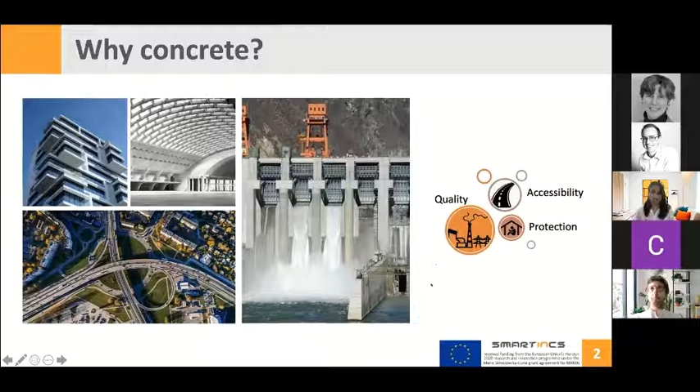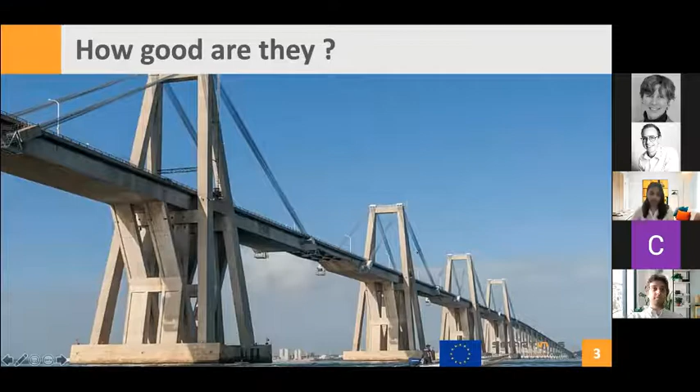Thank you, Gabriele. In the beginning of this workshop, Neely clearly mentioned how concrete and infrastructure is important for us. From a user point of view, concrete gives us quality of life in terms of accessibility and protection through buildings and infrastructure alike. But these marvelous structures don't always look in perfect condition and can perform their intended functions as required throughout their service life. During construction, they are given a certain performance range and also designed for a specific service life.

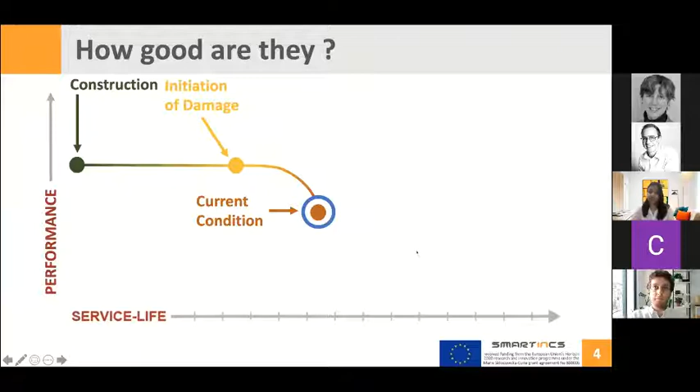During the service life, an initiation of damage can occur. In this current condition, it can be both internally and externally that damages affect different structures based on their environmental conditions. This can be some macro cracks that can compromise the durability functions, as we saw in earlier presentations, and lead to ingress of harmful ions like chlorides and sulfate attack, also inducing stress-induced damages.

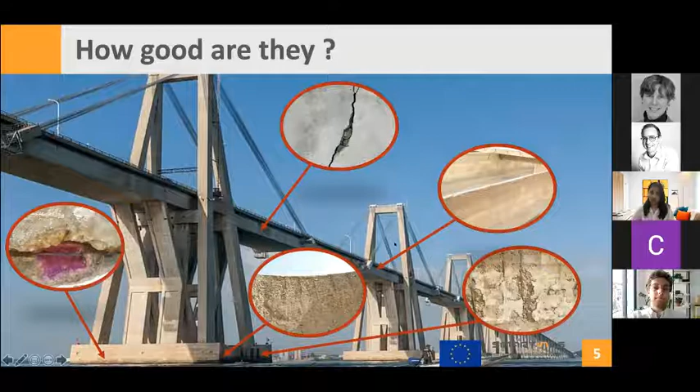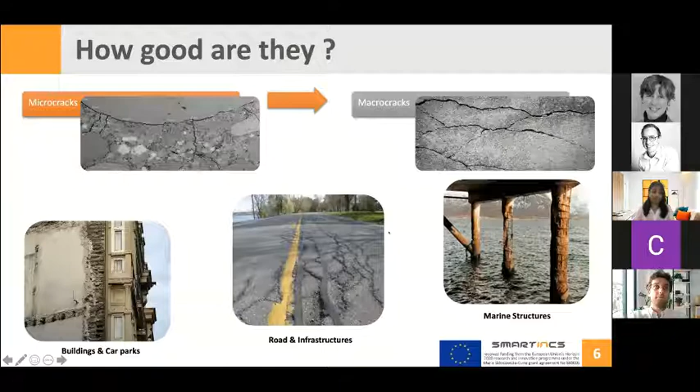This occurs in the range from micro scale, where the inevitable heterogeneous nature of cementitious systems creates microcracks, which, when unattended, can propagate to form macro cracks. And if that is also not controlled, it ultimately leads to damage of the entire structure. It can range from buildings and car parks in a normal environment to very extreme and harsh environments, such as in the case of marine structures.

And thus, in this current damaged situation, when no intervention is done, you can clearly see there's a reduction in performance and it does not achieve the required service life.

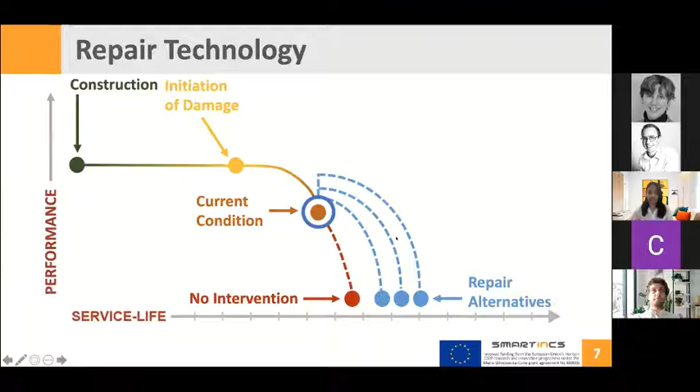In current practice, we have different repair alternatives where we attempt to increase the performance and also slightly increase the required service life. This repair technology can be both structural, like in the case of FRP sheets used for strengthening structural elements, some corrosion repair techniques using galvanic protection and coatings of the rebars, and more localized repair using repair mortars and epoxy injections for both patchwork as well as localized damages.

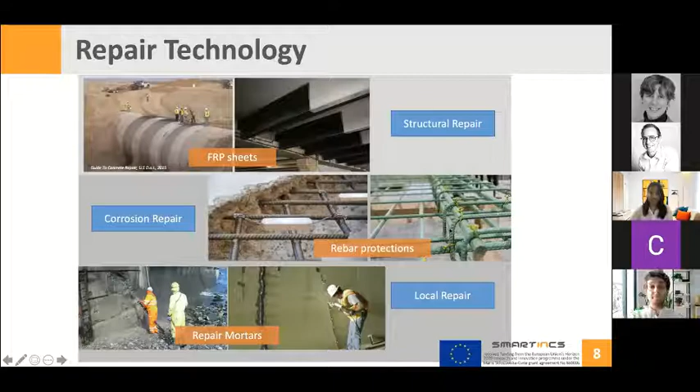However, there is still some challenge that exists in this repair technology. For instance, they are not entirely durable, meaning repetitive repair is required for the same place and the same damage scenario, which makes the whole system a bit inefficient in terms of cost and time. It can be alarming to note that per annum, billions of euros are spent only on repair and maintenance. And as we know, most repair technologies use cement-based systems, and cement causes a very big burden on the environment and can be very polluting.

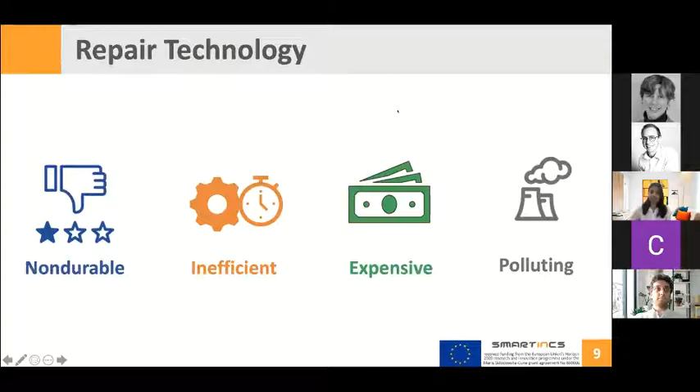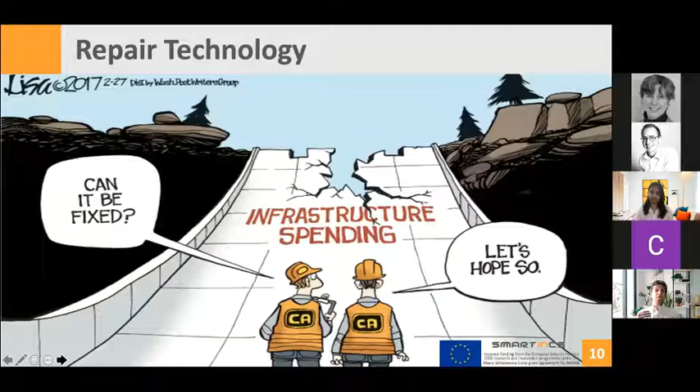This leads us to a comic which is actually quite accurate, where the spending, not just related to infrastructure but to every type of structure system, is extremely expensive. At the same time, this often becomes prohibitive from a practical, applicative point of view, so that whenever there is the question, can it be fixed? Well, the answer is, let's hope so, because most of the time, apart from being extremely expensive, it's also very complex and sometimes unfeasible from a practical point of view.

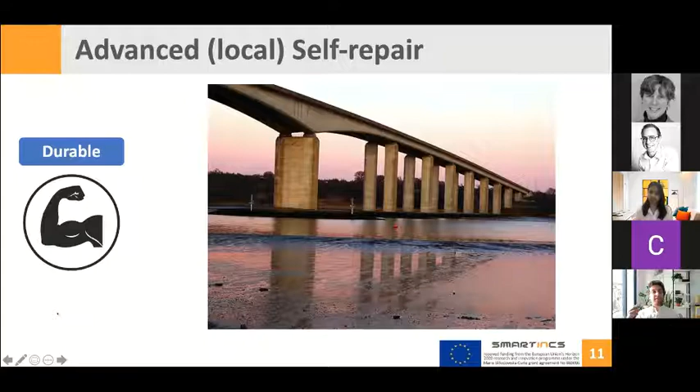So what if there was a system which was durable in terms of the performances it's been designed to achieve and accomplish, both structurally and from a serviceability point of view? At the same time, taking into account what Claire and Sina presented before us on self-healing, there are different self-healing, self-repair methodologies that can be applied and used to accomplish a durable and sustainable system.

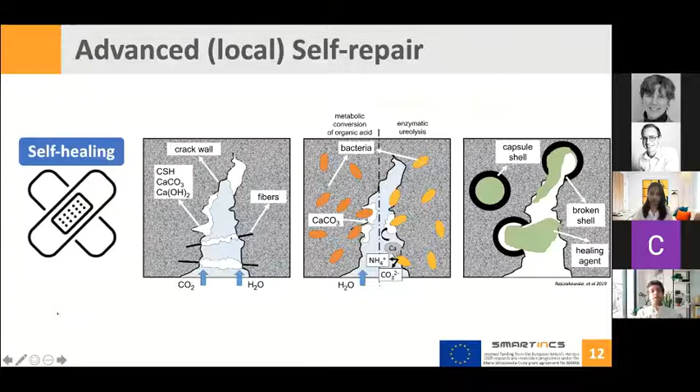Moreover, it could be very interesting to achieve a self-sensing approach related to the system, where different sensors and techniques and methodologies can allow us to understand how the system is getting damaged, how we can trigger the self-healing or self-repairing responses, and at the same time understand to what extent these repair processes have been effective and efficient.

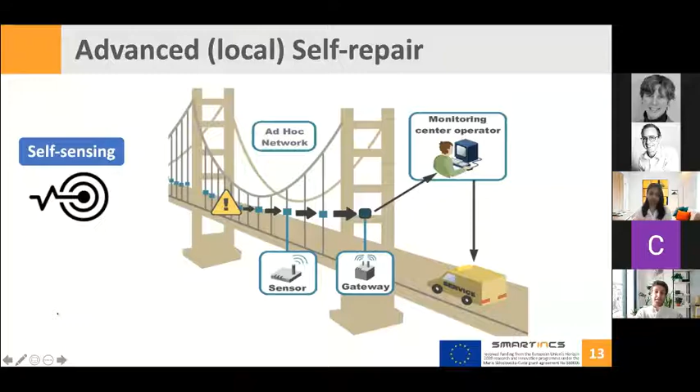As Priya has previously presented, at the same time, sustainable concrete is a very strong issue, as she has just said, that cementitious materials such as concrete, mortar, and grout are extremely polluting.

Allow me a brief digression with respect to our current times. We know that recently, several countries in Europe, but actually all over the world, are focusing on recovery funds to trigger the economy back after the strong hit suffered from the pandemic. This generally is reflected in the production and construction of many structures of different typologies. However, this is strongly in disagreement with the carbon neutrality pacts that many countries are committed to achieve by 2050.

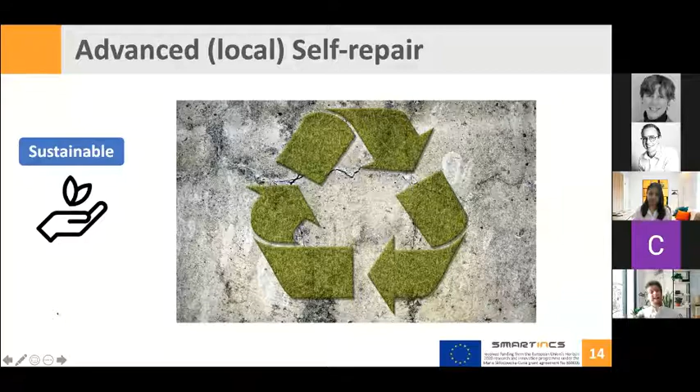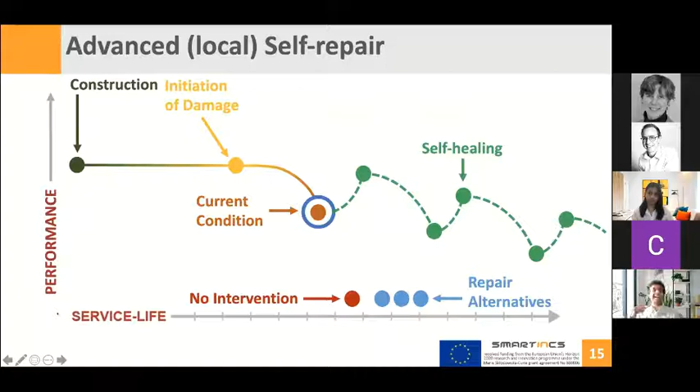So what if there was actually a system able to be sustainable and at the same time, why not, even depolluting? If we go back to the graph that Priya was showing us before, and having understood the current limits of the various repair alternatives we have right now, achieving a self-healing, self-repairing system might strongly increase the service life of our system, giving us a more durable, self-healing, self-sensing, and sustainable material.

And this is the SmartINCS ambition, within the 4 work packages where the 15 early stage researchers are working on how to investigate and produce related technologies. For example, work package 1 focuses on the material point of view, different self-healing, self-repairing methodologies that Claire and Sina have just presented. After that, the application approach, a practical use of these self-healing technologies applied in the construction field. Then we have work package 3 related to the durability point of view, on a time scale of the application developed in work package 2. Eventually, work package 4 focuses on the technological transfer, achieving a commercialization route for these methodologies.

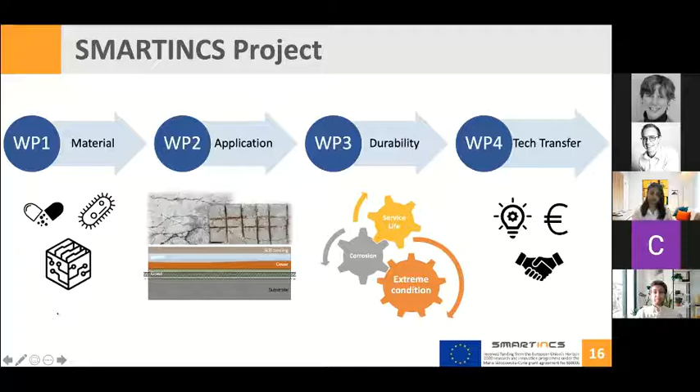Priya and I, and as I will explain in the following slide, 3 other early stage researchers belong to work package number 2, where we're focusing on the application use of the technological methodologies developed in work package 1. Who are we?

We're 5 early stage researchers working in 4 different universities in 3 different countries, all led by Professor Schlangen from Delft University of Technology. As you can see, we are formed by Sina, who just presented the previous work package, since his work is quite essential to both work packages, as he's focusing on the modeling point of view.

Then we have Suelen, who's working on an interesting self-healing cementitious grout. Then we have Priya, my co-presenter, who's focusing on self-healing repair mortars, and Sham, who's working on trying to exploit the potentialities of self-healing cover zone of concrete. Finally, there's myself working on the self-sensing point of view application of these self-healing techniques.

So like Gabriel mentioned, we are 5 different researchers working on different projects, but together we are trying to combine the different technologies we're developing to form one single multifunctional advanced repair system needed in this current scenario. This is intended to be durable, self-healing, as well as self-sensing, and of course optimized so that it can be deployed in the industry and benefit the ultimate goal that SMARTINCS works for.

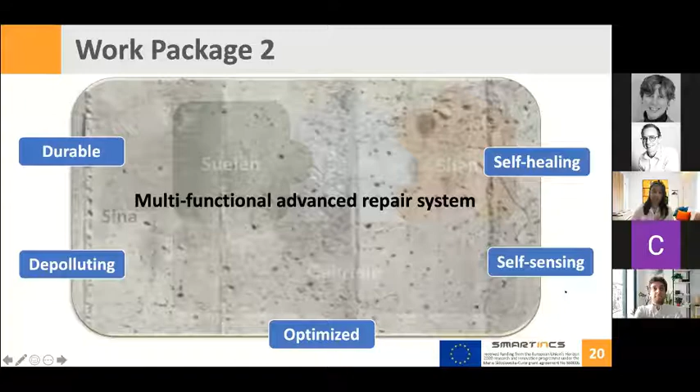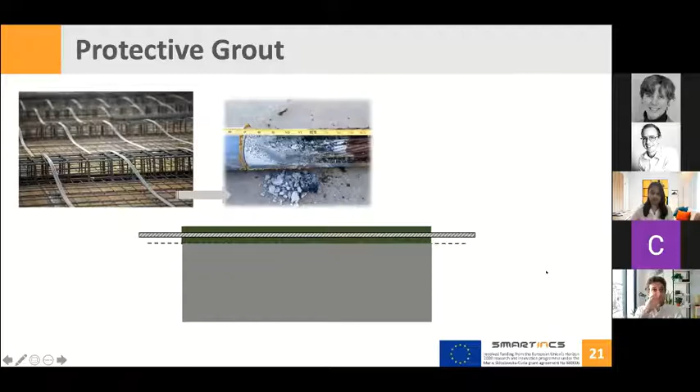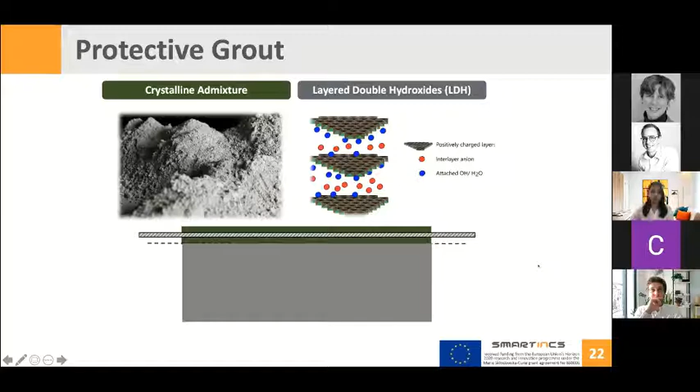To begin with, we have Suelen working on a protective grout. We know that post-tensioning strands in their current scenario undergo corrosion within the strand ducts itself. To prevent this, the protective grout is intended to cover the cables as well as the rebars. In order to achieve this, the use of crystalline admixtures as the core material, as well as layered double hydroxides which will exchange the harmful chloride ions, will be used. Ultimately, this will result in a non-shrinkable and durable grout system with the benefits of crystalline waterproofing admixture.

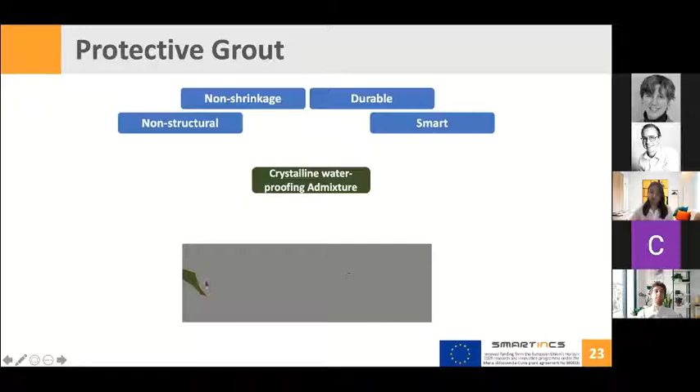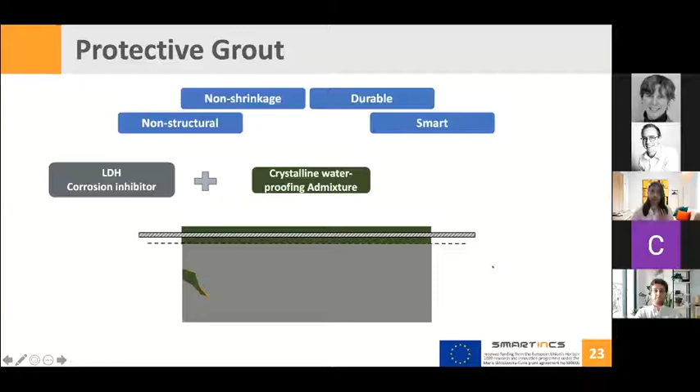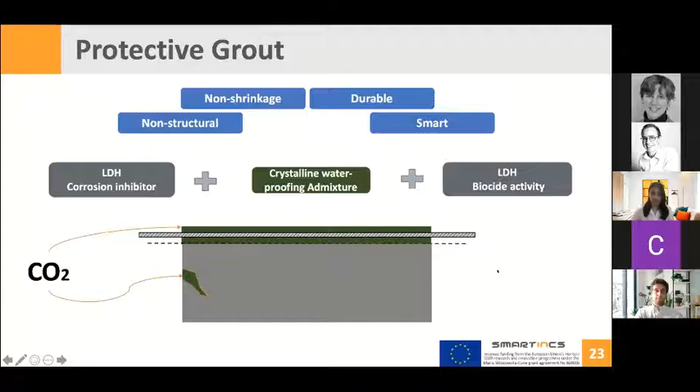This grout can also be used in a specific crack closing mechanism in the concrete itself. With the addition of layered double hydroxides, a corrosion inhibiting property will be added to prevent corrosion from happening in the system. Also, a specific type of layered double hydroxide will be investigated with the benefits of biocide activity, which will absorb carbon dioxide in the atmosphere, ultimately providing us with a depolluting system.

So far, Suelen has successfully developed the grout coating with the required properties, such as efflux time, as well as the bleeding property. Also, a very good synthesis of the layered double hydroxide has been commenced in-house itself.

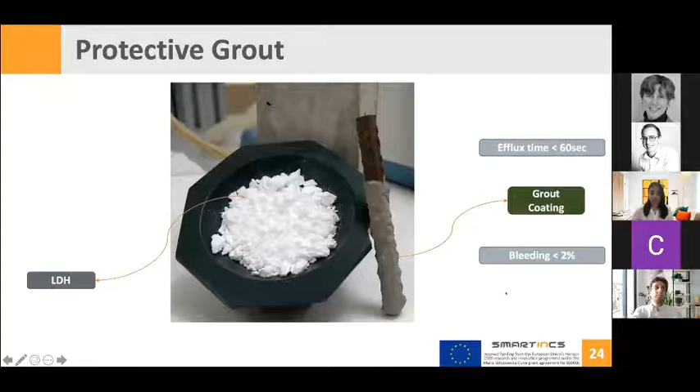In the further upcoming steps, she will be investigating the electrochemical potential as well as the corrosion-resistant properties of this protective grout. Following which, with the grout system in place, we have the concrete cover that protects the substrate as well as the reinforcement. But a poor concrete cover zone will cause damage to the substrate, and with the ingress of harmful ions, corrosion can initiate and there can be a loss of structural integrity, which was clearly seen in the earlier presentations.

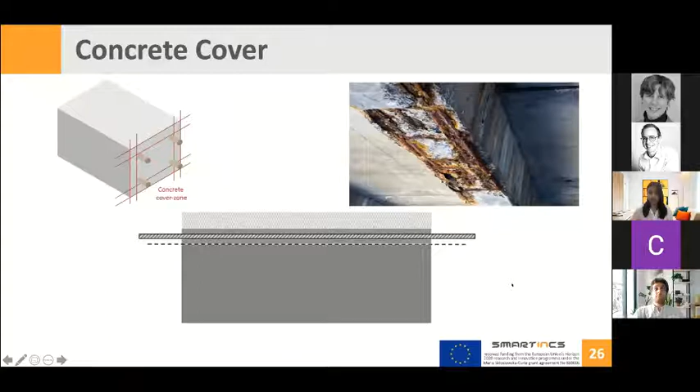In order to prevent this, Shan, one of our researchers, is working on strain hardening cement composites that will provide enhanced durability, reduced service life costs, and ultimately protect the substrate, giving a negligible effect not only on the substrate but also the reinforcement lying underneath it.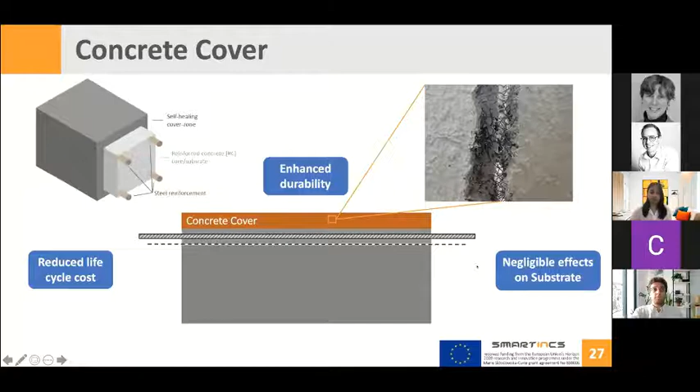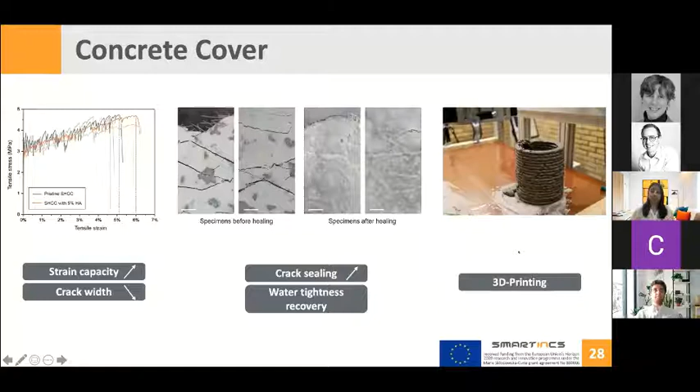So far, he has successfully achieved the required strain capacity and a drastic reduction of the crack width was achieved. In terms of self-healing, which was autogenous, as you can see from the image, a water tightness recovery was achieved. Looking from an application point of view, he has also developed the mixture to be most compatible in terms of 3D printing. In the upcoming steps, he will be casting more composite systems with the strain hardening systems and investigating its performance evaluation in real time as well as its structural performance.

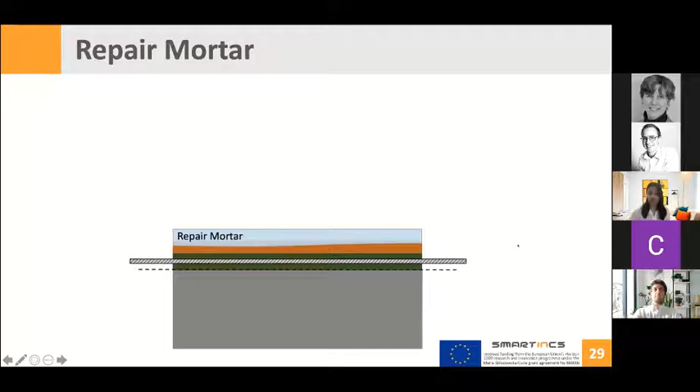More often, the cover zone can also be damaged on a superficial level, and that's where the industry uses several types of repair mortars that can be used both for localized damage, as a patchwork for physical damage, but also for localized corrosion protection.

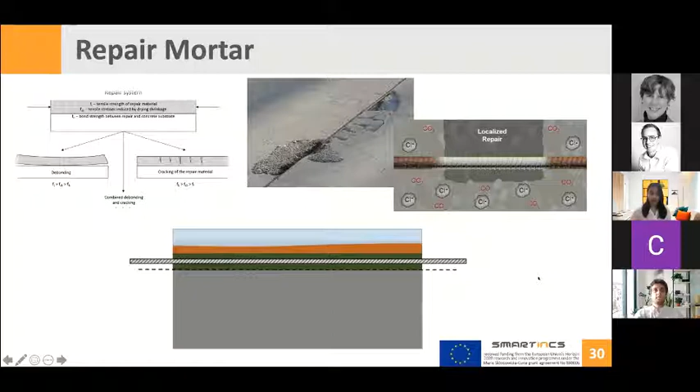But the inherent nature of the repair mortar itself means it can undergo two different damage scenarios: one being debonding from the substrate itself, and the other being direct cracking of the repair mortar. Also, a critical challenge with localized patch repair is that localized corrosion can occur in the areas adjacent to the repair.

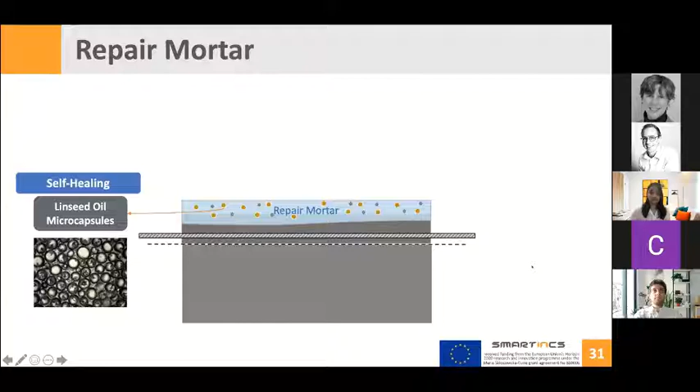In order to prevent this, I will be trying to develop a repair mortar with self-healing capacity using linseed oil microcapsules that can overcome the challenge of debonding and cracking of the repair mortar itself, along with the addition of modified hydrotalcites to make the repair mortar more corrosion resistant.

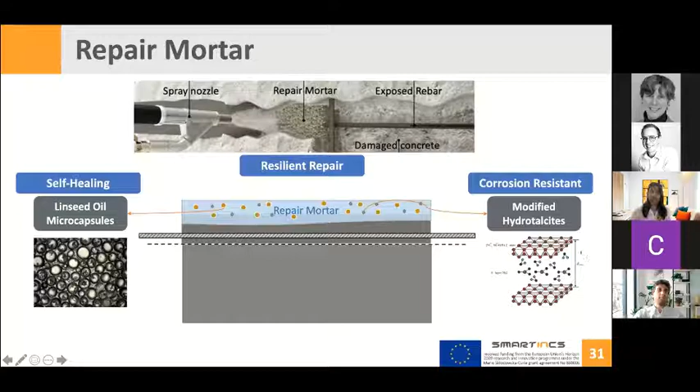Ultimately, a resilient repair system will also be developed in order to be deployed in terms of spray systems for both localized as well as large scale applications.

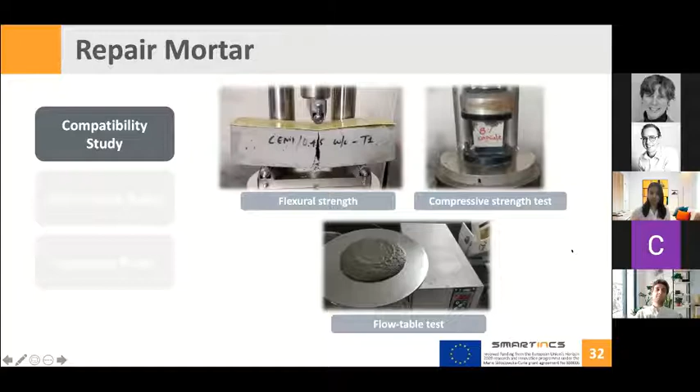Currently, I have successfully studied the compatibility of these microcapsules at different capsule percentages. An ongoing self-healing study in terms of active crack control and healing observation is underway. For the specific corrosion study, a systematic procedure will be carried out to measure the chloride penetration depth, and the inhibition capacity in terms of the performance efficiency of the inhibitors included will be studied.

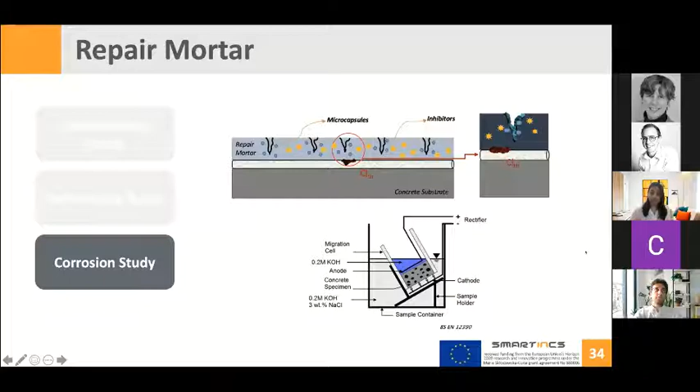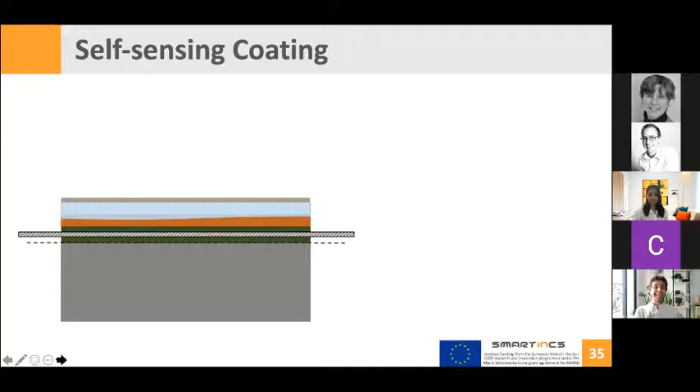With all the systems in place, we have the self-sensing coating. So after discussing these three layers, it is time now for my research, which relates to sensing coating. Basically, what I'm trying to achieve is the production, construction, and application of a sensing coating, which can be both cement-based and polymer-based, to be applied on top of a substrate whose state of damage we want to study and understand.

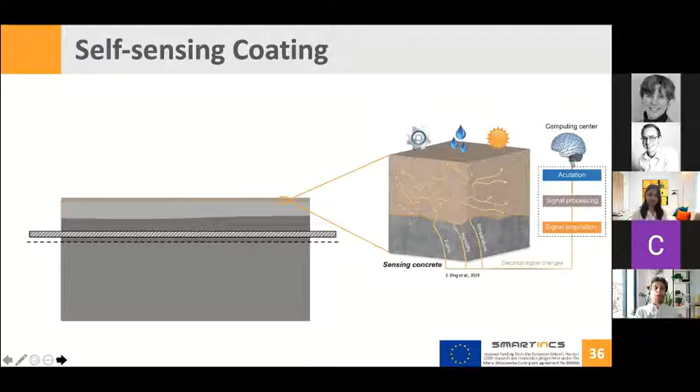So how do we do that? Basically, what we're trying to do is exploit the properties of different types of carbon nanomaterials. Here are some of the candidates used to electrically modify the cementitious-based or polymer-based sensing coating. At the moment, I'm focusing my research on graphene and graphite, but soon I will move towards carbon nanotubes and carbon nanofibers. The idea is to find the optimal type of carbon nanomaterial, as well as the content and different characteristics of such a material.

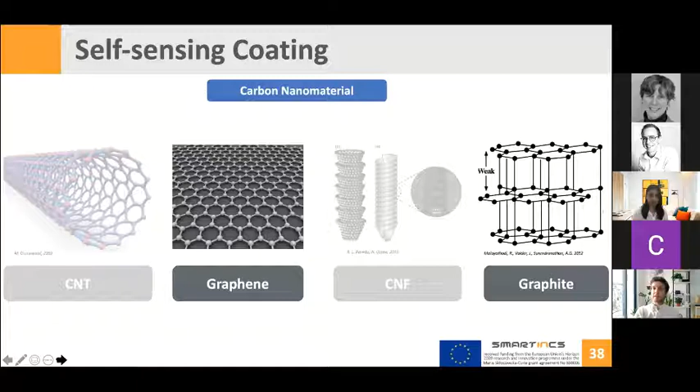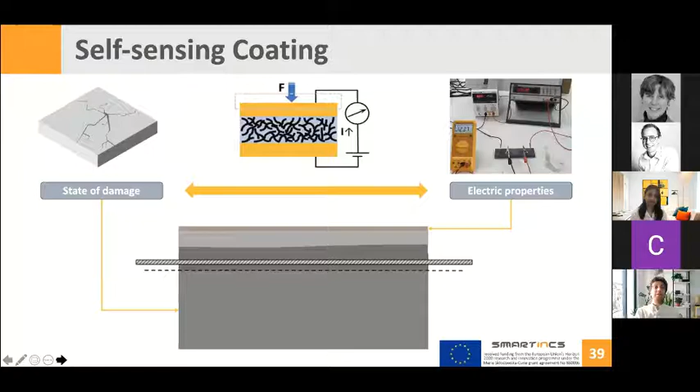Again, as we know, cementitious materials are electrically non-conductive. So if we apply these carbon nanomaterials and use their electric properties, we are able to obtain a semi-conductive system. If we're then able to connect these electric properties of the coating to the state of damage of the substrate we want to study, we will be able to achieve the piezo-resistive effect, also called piezo-resistivity, giving an understanding of the state of stress and/or state of strain of the system.

At the same time, in view of a practical application, we are trying to understand which methodology might be best for application in the field. For example, apart from the classic casting process, shootability, printability, and sprayability become very interesting options that we are currently investigating to understand which might be the best in the field.

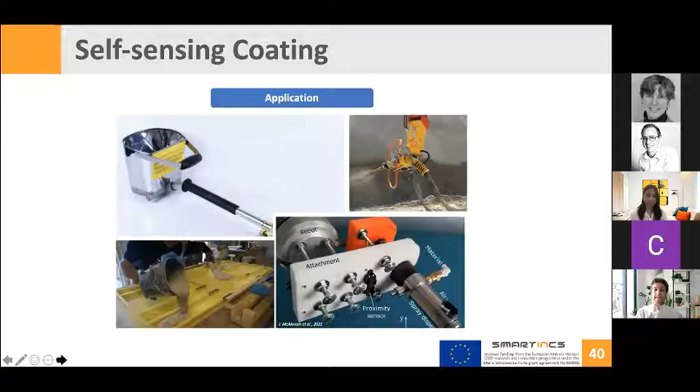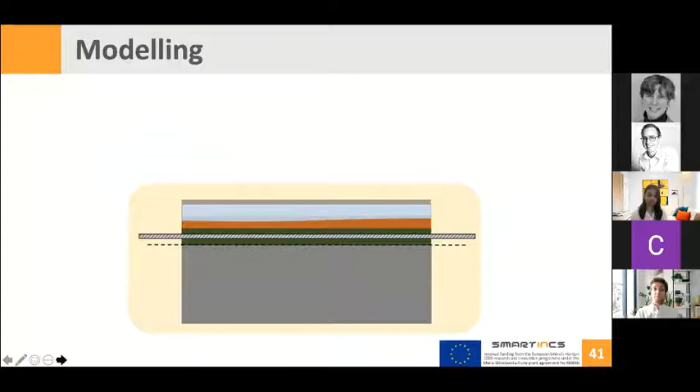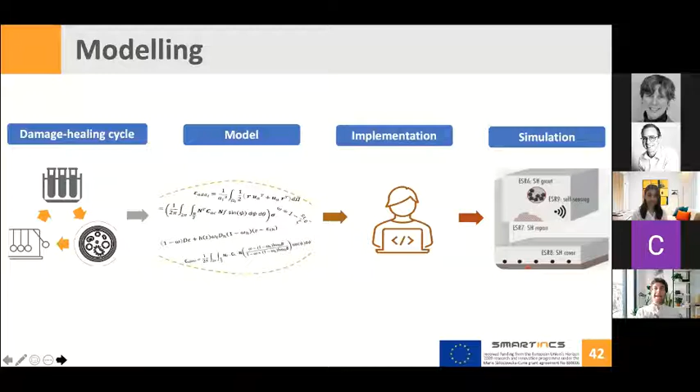Once we have discussed these four layers, it is time to move towards the last early stage researcher involved in this work package, which is Sina, who's involved in science-based modeling and simulation of self-healing, self-repair methodologies. What he's trying to do is basically get an understanding of the physical and chemical processes behind the damage-healing cycle and relate them to mathematical equations and models, in order to implement them on the computer and produce a finite element modeling process.

If we take into account, for example, a self-healing, self-repairing mortar, Sina would try to, using a micromechanical multi-scale approach, get the mechanical properties of such a material and relate it to the amount, for example, of self-healing microcapsules embedded inside. Then he would be able to simulate and model, and therefore understand the optimized content of microcapsules needed to achieve a certain mechanical property.

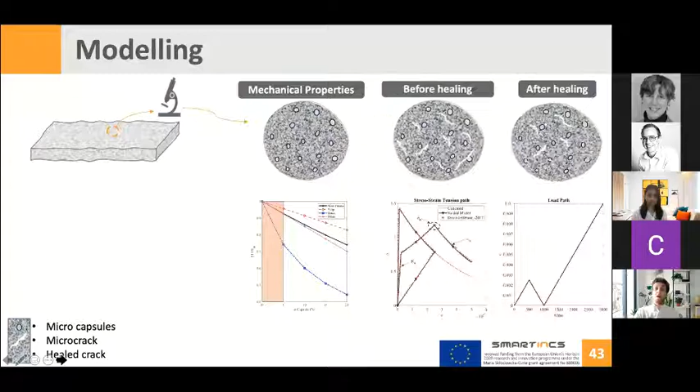The next step would be then to model and simulate the response of the system to healing.

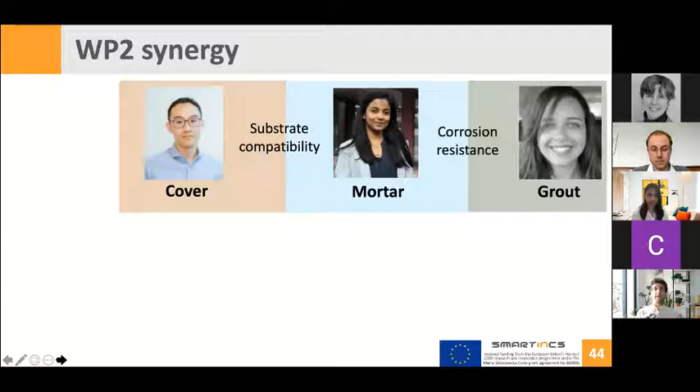So as you can see, all these five different projects can result quite different, but in the end there is great room for cooperation within work package number 2. For example, if we take into account the work on the concrete cover zone developed by Shan, and the self-healing mortar that Priya is focusing on, there is strong room for collaboration related to substrate compatibility. At the same time, with the grout work that Suellen is working on, corrosion resistance is a strong point of connection between Priya and Suellen. Moreover, grout in practice is usually used for several reasons, and quite often the mortar is applied on top of it.

Furthermore, if we consider also my project on self-sensing cementitious systems, clearly there is a strong interaction with the three researchers above, since having an understanding of the efficiency and efficacy of the healing process, while at the same time triggering such a process, becomes quite interesting and full of opportunities and possibilities.

Finally, the modeling developed by Sina would become clearly essential for us, on one hand to understand and optimize our mix design, but at the same time to simulate and know what to expect during the self-healing, self-repair process.

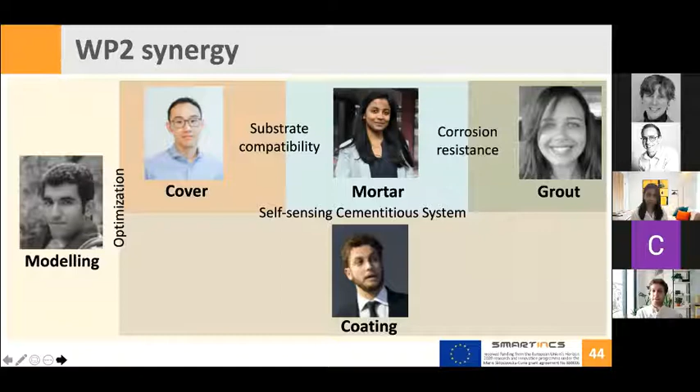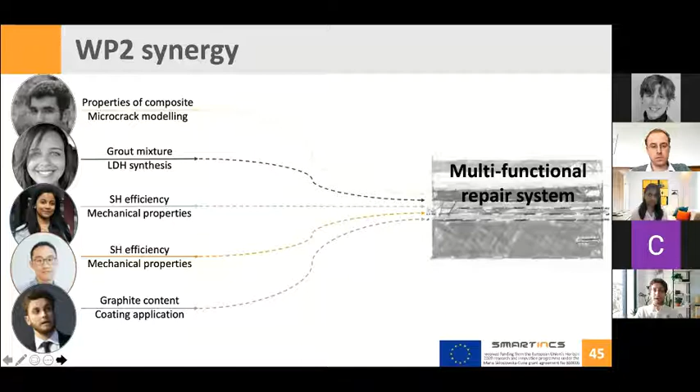To conclude, although we have five different projects and all five of us appear to be at five different points, parallel yes, but independent of one another, in the end all these projects will eventually converge towards the ultimate goal of work package number 2, which is the production of a multifunctional repair system for advanced local self-repair.

So if we can go back to the first comic at the beginning of the presentation, whenever there is this 'can it be fixed' question, the actual answer, the actual reply would be: yes, it can.

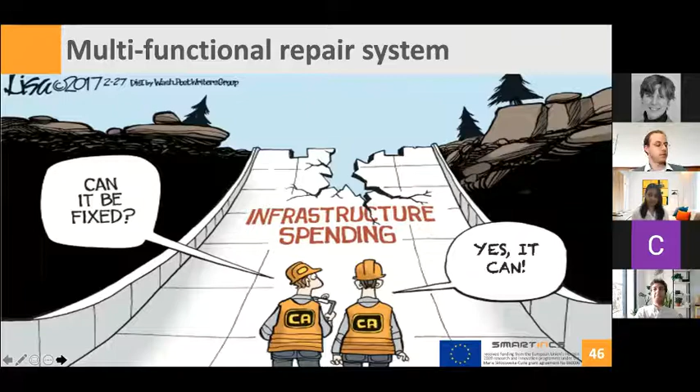Thank you. Thank you, Priya. Thank you, Gabriele. I'm looking now in the chat, and I think that up until now we are just receiving one question.

So is there already an estimate of how the investment costs of self-healing concrete increase compared to normal traditional concrete?

Yes, so there are a couple. Clearly the self-healing concrete is much more expensive than normal concrete. However, there are some estimates at the moment in the literature that allow us to understand that although there's a higher initial cost, the advantages in the long term with respect to self-healing and with respect to the service life of the system are much higher. So clearly there are, and I'm sure that Vanessa and Davide, who will present after us, are slightly more related to this topic and might be much better able to answer this question.

Yes, and just to add to what Gabriele said, clearly the initial cost is high, but comparing the cost of the repair, where you have to do multiple repairs for the same damage scenarios, the margin is quite large, and hence the additional cost of repair can be drastically reduced, which brings the net expenditure to a much more comfortable number.